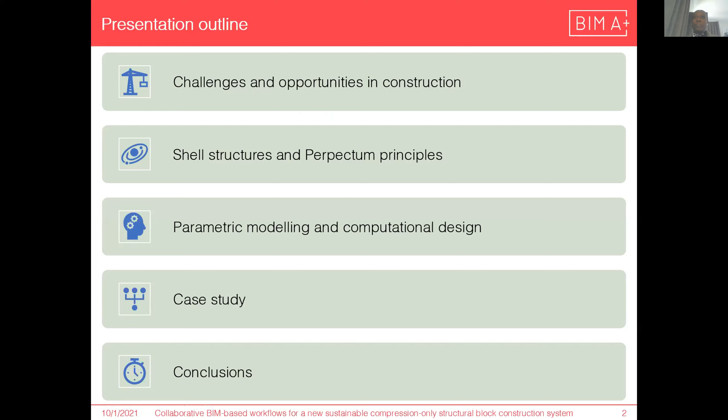Research has shown that the construction industry is lagging behind in terms of productivity, growth, digitalization, and sustainability. This is compared to other industries. So part of the reason for this is that most structures are made from steel reinforced concrete. But steel is prone to corrosion, which leads to disintegration of the concrete, and it affects the durability of concrete structures.

It is possible to make concrete only structures if they are compression only, such as with the 2,000-year-old concrete Pantheon in Italy. This increases the durability of the structures.

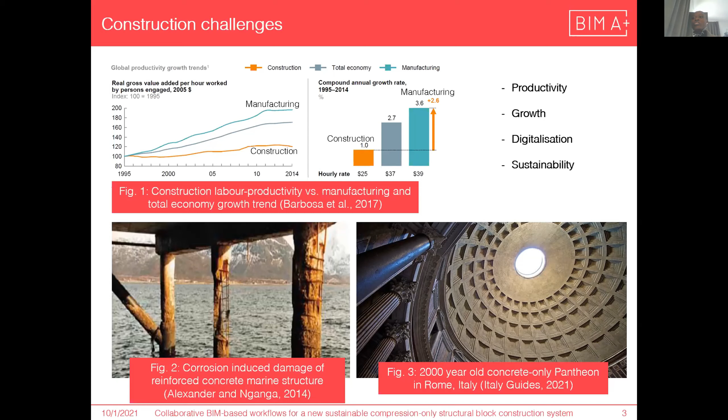The World Economic Forum has suggested some ways to improve the construction industry. Some of these include firstly through digitalization, such as with the use of building information modeling, which increases interoperability and collaboration between the stakeholders. The second of these is through material optimization and sustainability, such as with the use of innovative materials. The third is through construction systems optimization, such as through prefabrication of structures.

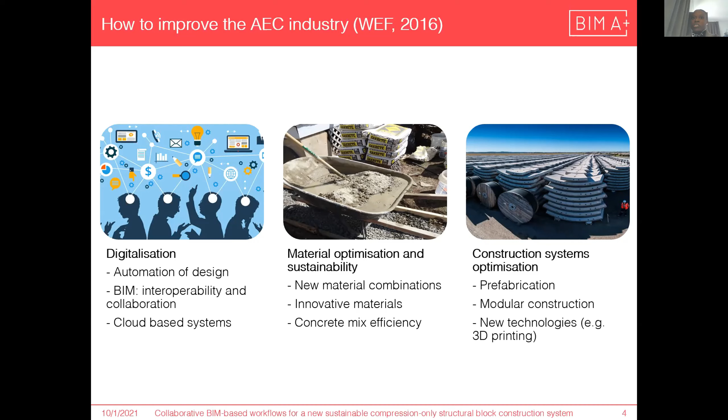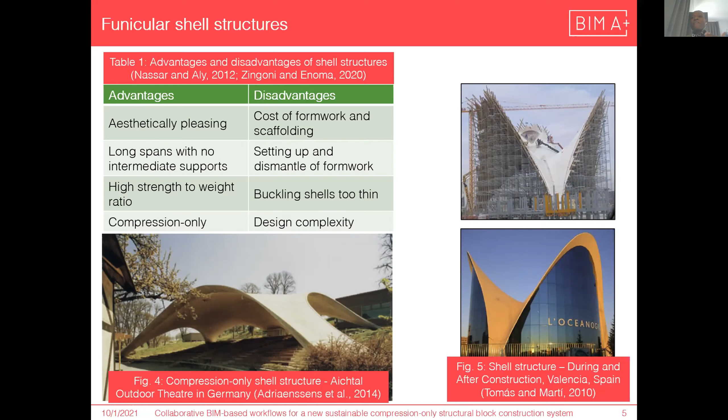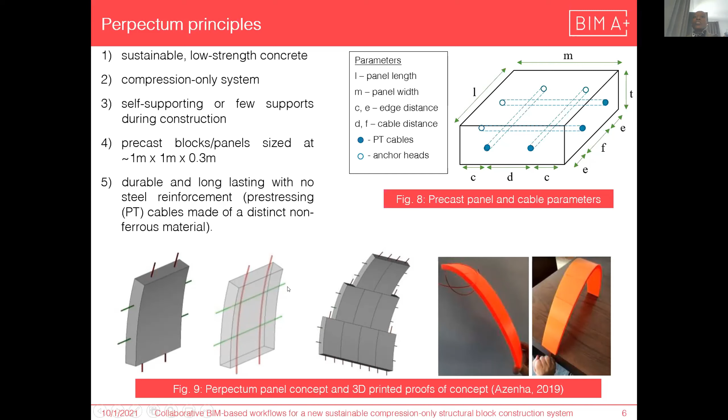Perpectum principles were theorized in 2019 by Azenha to address some of the challenges that have been highlighted. These principles include having a sustainable low-strength concrete compression-only system, which is self-supporting or has just a few supports during construction. It is a precast system with panels sized about a meter, and 300 millimeters thick, and it is composed of durable and long-lasting PT cables to connect the blocks.

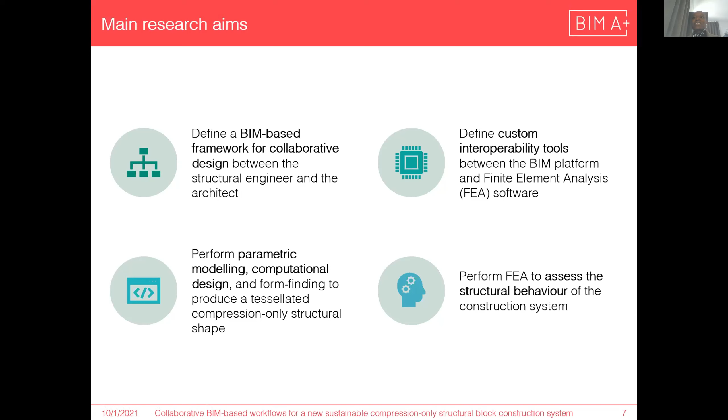So for this reason, the main research aims for the project were firstly to define a BIM-based framework for collaborative design between the two main stakeholders, the structural engineer and the architect. Secondly, to perform parametric modeling and computational design, including form finding to produce the compression-only structure. Thirdly, to define custom interoperability tools. And finally, to perform structural analysis to assess the behavior of the proposed construction system.

The framework which was produced consists of 3 processes, and it's simplified to a project with only the architect and the structural engineer. For the first process, geometry definition occurs, starting with the client requirements and a concept sketch by the architect, which is discussed with the engineer to come up with an initial shape in Rhino.

In the second process, the BIM model is defined, and further information is added. This model is then connected to the structural analysis software, where the geometry is reproduced using custom tools. And finally, the structural analysis is performed in Diana.

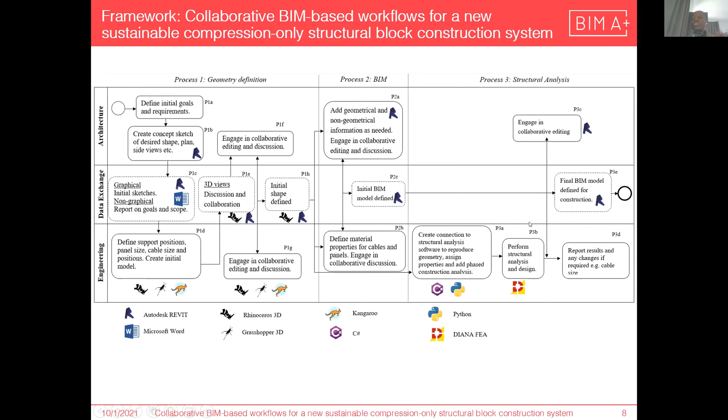The parametric modeling and computational design was carried out using the visual programming language Grasshopper 3D. The process involved firstly defining a planar surface, and then defining a network of particles and lines. An upward force was assigned to the particles, and a stiffness was assigned to the lines.

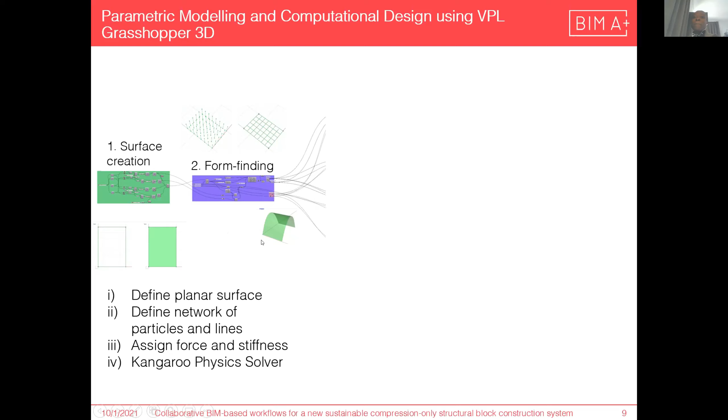This information was then input to the Kangaroo physics solver, resulting in a 3D mesh, as for instance shown in the picture. Thereafter, this same information was used to create lines which represent the PT cables in two directions. The surface was further tessellated to have individual blocks and thickened.

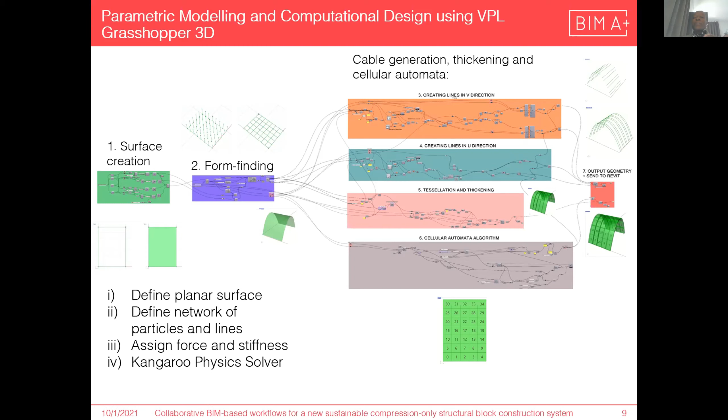Then a cellular automata algorithm was set up to be related to the chosen construction system for the panels and the PT cables. A case study was set up to assess and evaluate the proposed methodology, as well as the proposed framework. The case study consisted of four curves, two short and two long curves, which, following the process just described, resulted in a planar surface.

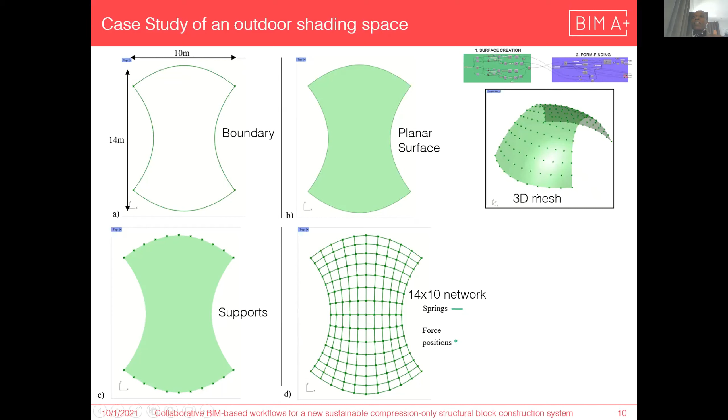The supports were chosen to be at either end of the structure as shown in the figure. And this surface was further divided into a 14 by 10 network, so that the resulting individual blocks would be approximately a meter by a meter. This information was fed into the Kangaroo physics solver, resulting in this 3D mesh. After which the process described previously was followed, and the surface was thickened for a 300 millimeter result for the panels.

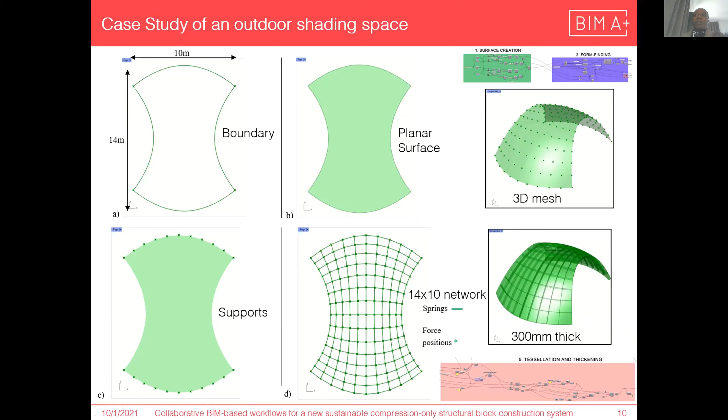For the cellular automata algorithm in Grasshopper, for this particular case study, the construction sequence selected was to have the sequence starting from the inner lowest blocks and then outwards to the top of the structure. So what this means is that each construction stage refers to the addition of a new block and its respective PT cables to the structure. So for instance, at stage 29 individual blocks have been added to the structure following the chosen assembly sequence.

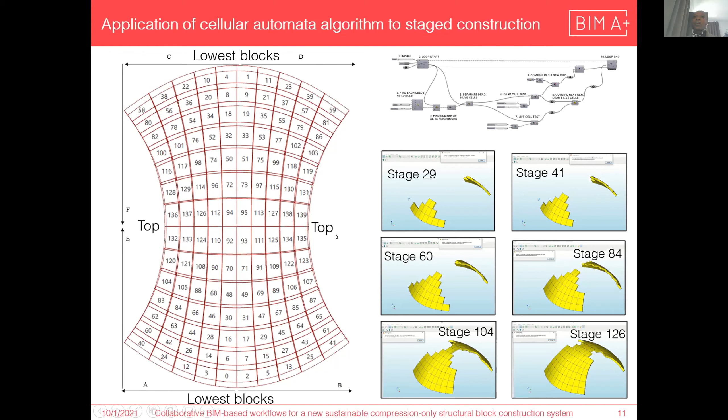For this process to work, it was necessary to have plugins and custom interoperability tools to and from the BIM platform. For the first part, plugins are available to ensure that the geometry from the 3D model to the BIM model is kept intact, especially using the Rhino.Inside.Revit plugin. However, for the next process, it was necessary to create custom tools to transfer the geometry from the BIM platform to the structural analysis platform. This required accessing the Revit API to create a custom Python script, as well as a further Python script for the automatic definition of the properties, as well as for the phased analysis.

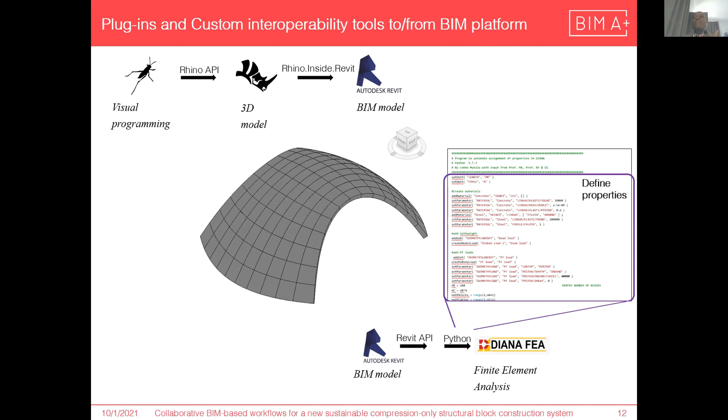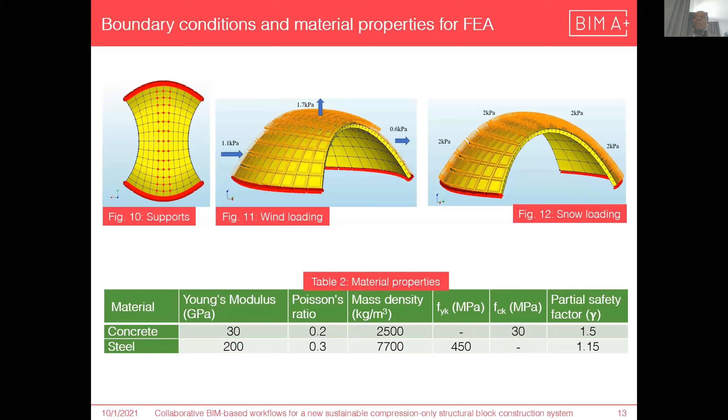The following boundary conditions and material properties for the finite element analysis were used. As mentioned, the permanent supports were chosen to be on the short curves, and provisional supports were set up in the middle of the structure. Wind loading and snow loading was also applied to the structure, and 30 MPa concrete and 450 MPa steel were chosen for preliminary checks of the proposed construction system.

The finite element analysis results show that during construction, the stresses stay below 1.35 MPa design tensile strength. This is also the case after construction, when the wind loading and the snow loading were added and the structure was checked for the ultimate limit state.

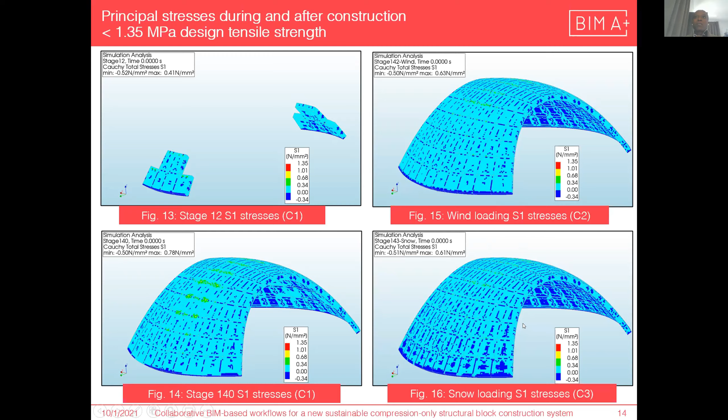In conclusion, it was shown that it's possible to set up a framework for parametric modeling and computational design to achieve interoperability and collaboration between engineers and architects. It was also shown that it's possible to have material optimization and sustainability by foregoing steel reinforcement to increase durability. And third, optimization of construction systems is possible by using prefabricated panels and an automated construction system.

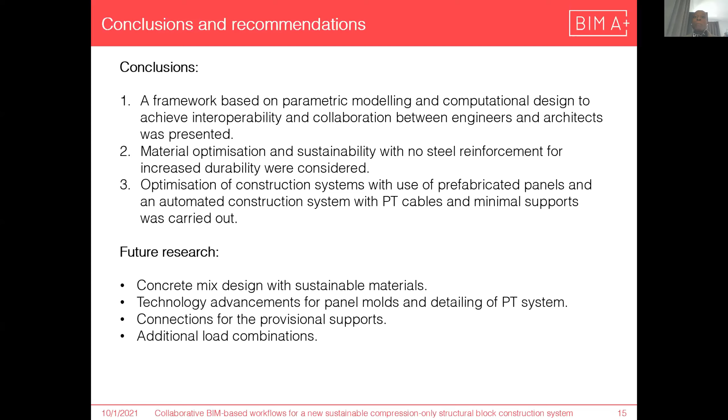And for future research, we would like to look into optimizing concrete mix design by using sustainable materials. And for the system to work, it will be necessary to have technological advancements for panel molds, as well as for the detailing of the proposed PT system, including connections for the provisional supports and assessing how the structure would behave with more robust load combinations.